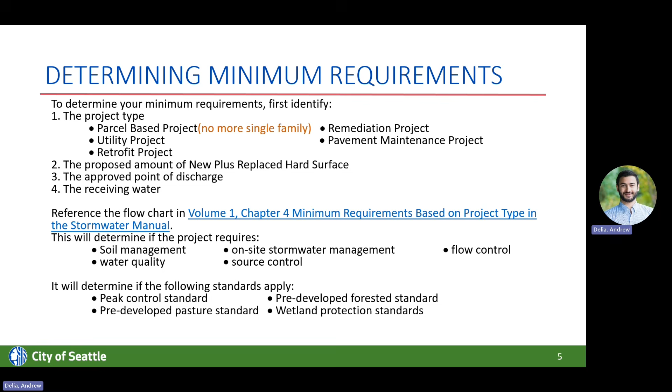Reference the flowchart in Volume 1, Chapter 4, titled Minimum Requirements Based on Project Type in the Stormwater Manual. This will help you determine if the project requires soil management, on-site stormwater management, flow control, water quality, and/or source control. It will also help you determine if the following flow control standards apply: peak control standard, pre-developed forested standard, pre-developed pasture standard, and/or the wetland protection standards.

Stormwater review requirements. Stormwater review is required for all projects with 750 square feet or more of new plus replaced hard surface. For projects equal to or greater than 750 square feet, drainage review is required, and the submittal requirements are a small project CSC soil standard plan, a stormwater plan, and an infiltration investigation only if there is no off-site approved point of discharge.

For projects greater than or equal to 750 square feet on a lot adjusted in size after 2016, stormwater review is required and on-site stormwater management applies to the project. The submittal requirements include the small project CSC soil standard plan, the stormwater plan, the OSM calculator, and an infiltration investigation if the site is required to investigate infiltration feasibility or to prove infeasibility of infiltrating BMPs.

For projects greater than or equal to 1,500 square feet of new plus replaced hard surface, stormwater review is required and on-site stormwater management applies. The submittal requirements are the same: a small project CSC soil standard plan, a stormwater plan, the OSM calculator, and an infiltration investigation.

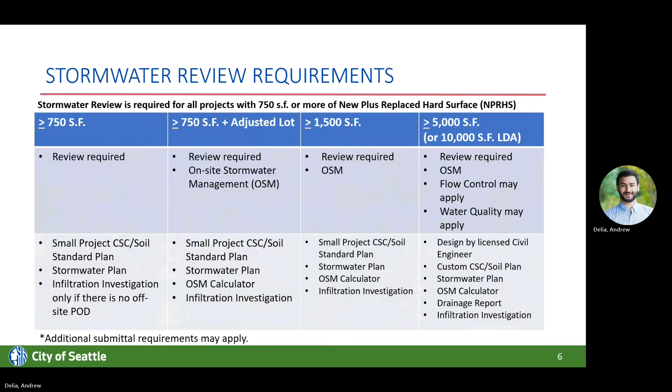Stormwater review requirements continued. In the last slide, we talked about the basic new plus replaced hard surface thresholds for drainage review. However, there are a few additional stormwater review triggers that are not determined by the new plus replaced hard surfaces. Stormwater review is required for all projects that require a grading permit. Stormwater review is required if you are applying for a subdivision, short plat, unit lot subdivision, or lot boundary adjustment.

Some projects with activities that are likely to require source control BMPs may require stormwater review. Projects that propose any new hard surface on Category 1 peat settlement sites require stormwater review. Sites with greater than 5,000 square feet of land disturbing activity or demolition require stormwater review. Projects that propose new or replaced hard surface or any land disturbing activity on, adjacent to, or within environmentally critical areas may trigger drainage review.

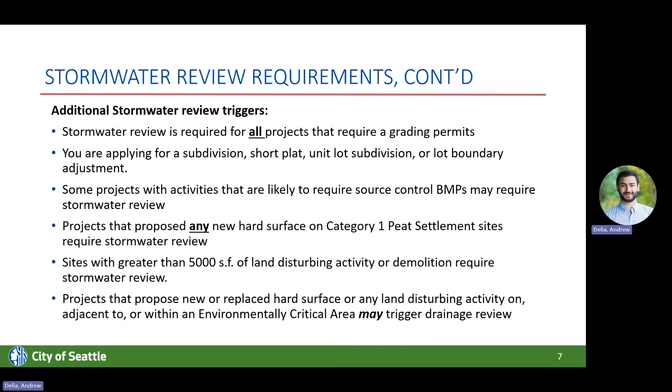New hard surfaces. Before we move on to the different stormwater management thresholds, I want to review some important definitions and concepts, some of which have changed or are new to the 2026 code update. We'll start with hard surfaces, as it is important to understand this since most review thresholds are determined by the amount of proposed new plus replaced hard surface. New hard surface means the creation of a hard surface or the conversion, modification, or upgrade of an existing hard surface to another hard surface.

Examples of a new hard surface include, but are not limited to, converting, modifying, or upgrading, such as the following: vegetation, lawn, dirt, or other earthen material to a hard surface, for example, compacted gravel, packed earthen material, permeable pavement, a bituminous surface treatment such as chip seal, asphalt, concrete, or a structure. Gravel to permeable pavement, chip seal, asphalt, concrete, or a structure. A hard surface to a modified hard surface, for example, grading an existing parking area and repaving.

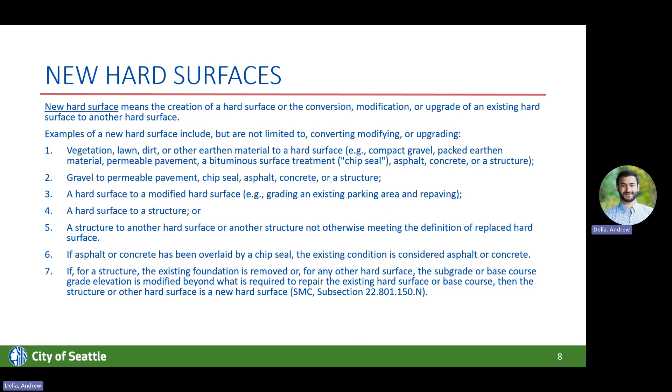A hard surface to a structure, or a structure to another hard surface, or another structure not otherwise meeting the definition of replaced hard surface. If asphalt or concrete has been overlaid by a chip seal, the existing condition is considered asphalt or concrete. If, for a structure, the existing foundation is removed, or for any other hard surface, the subgrade or base course grade elevation is modified beyond what is required to repair the existing hard surface or base course, then the structure or other hard surface is a new hard surface. Refer to Seattle Municipal Code subsection 22.801.150.N as in Nancy.

Replaced hard surfaces. Replaced hard surface means, one, for structures, the removal of the structure down to, for example, exposing the top of the foundation without removing the foundation, and replacement of the structure. And two, for other hard surfaces, the removal of the surface down to the existing base course or exposing the top of the subgrade and replacement, including repair of the base course layer.

As shown in orange, note that in the 2026 code, replaced now includes situations where a structure is removed down to a foundation, but the foundation, slab, or basement is to remain.

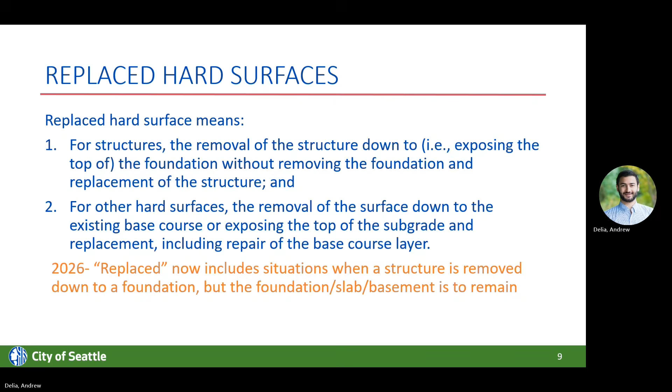Approved point of discharge for stormwater. Stormwater, subsurface drainage, and sanitary points of connection are usually identified in the Preliminary Assessment Report, or the PAR. If your project did not receive a PAR, contact SPU to make this determination using the email address sidesewerinfo@seattle.gov. Stormwater points of discharge include the public storm system, such as a storm main, or alley discharge, which is

applicable to small projects only, providing less than 5,000 square feet of new or replaced hard surface where a curb and gutter exists. The public combined sewer is an approved point of discharge. An on-site infiltration/dispersion can also be an approved point of discharge. This is often referred to as no off-site point of discharge.

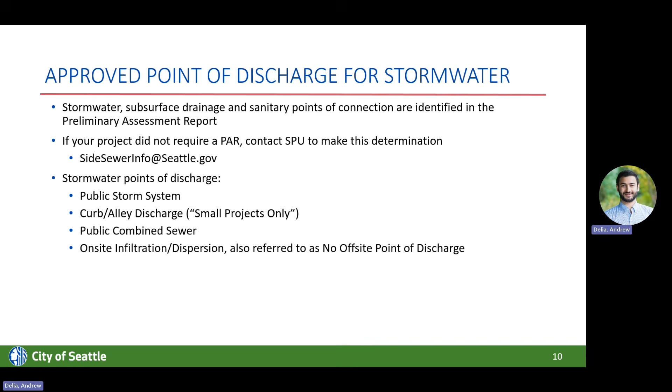Closely related projects. Closely related projects must be evaluated as one when determining stormwater thresholds. See Volume 1, Section 2.1.2 of the 2026 Stormwater Manual for the code excerpt, Closely Related Projects. Closely related projects means two or more projects that are concurrently under review, have issued permits not yet approved for final construction, or both, and share any of the following physical or functional interdependencies.

1. A feature physically spans the property lines between lots or project sites, such as shared structures, shared driveways, shared pedestrian access, including easements to rights-of-way, shared drainage and utility designs, foundation footings, or retaining walls. For purposes of this subsection, abutting driveways or pedestrian accesses are not considered to span the property lines if the required driveway or pedestrian access width for each project independently meets development standards.

2. A shared driveway is proposed to access a parking area for more than one project, regardless of whether the parking is required. 3. Parking, including maneuvering, aisle requirements, or other parking-related easements, regardless of whether the parking is required, is proposed to be provided or partially provided on the site of another project, even if the project sites do not abut each other. 4. Proposed structures are joined or share a common wall. 5. Proposed projects share required open space, amenity area, or both.

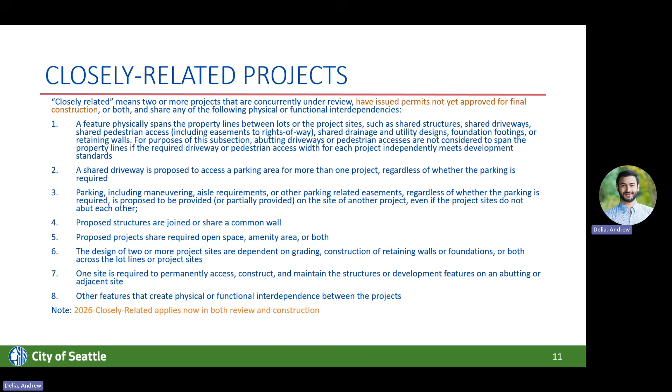Common Plan of Development. Entirely new to the 2026 code is the definition for Common Plan of Development or Sale. See Volume 1, Section 2.1.3 of the 2026 Stormwater Manual for the code excerpt related to Common Plan of Development or Sale. Common Plan of Development or Sale means a site where multiple separate and distinct construction activities may be taking place at different times, on different schedules, and/or by different contractors, but still under a single plan.

Examples of Common Plan of Development or Sale include, but are not limited to, phased projects and projects with multiple filings/lots, even if the separate phases or filings/lots will be constructed under separate contract by separate owners, for example, a development where lots are sold to separate builders.

2. A development plan that may be phased over multiple years, but is still considered under a consistent plan for long-term development. 3. Projects in a contiguous area that may be unrelated, but still under the same contract, such as construction of a building extension and a new parking lot at the same facility. And 4, linear projects such as roads, pipelines, or utilities.

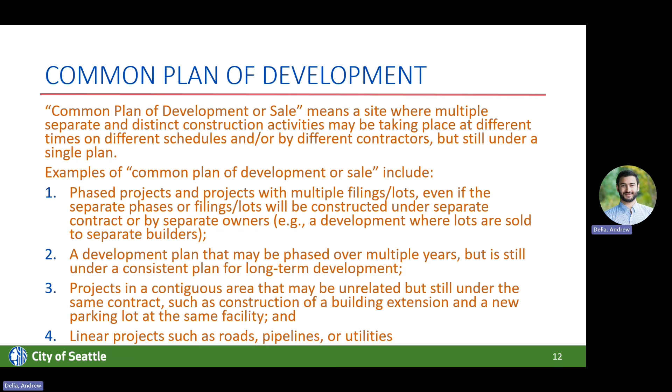Stormwater management thresholds. Refer to Seattle Municipal Code, Section 22.805.050, parcel-based project thresholds. On-site stormwater management remains unchanged in the new 2026 code, and 1,500 square feet of new plus replaced hard surface triggers OSM. Flow control in combined sewer basins also remains the same. 5,000 square feet of new plus replaced hard surface triggers flow control in combined sewer basins.

Flow control in creek basins also remains unchanged in the 2026 code, as 5,000 square feet of new plus replaced hard surface triggers flow control in creek basins. Flow control in small lake basins has increased in threshold in the 2026 code. Previously, 2,000 square feet of new plus replaced hard surface would trigger flow control in these basins, and in the 2026 code, 5,000 square feet of new plus replaced hard surface will trigger flow control in small lake basins.

Flow control in capacity-constrained basins also changes in the 2026 code. Previously, 2,000 square feet of new plus replaced hard surface would trigger flow control. Now, 5,000 square feet of new plus replaced hard surface will trigger flow control in capacity-constrained basins.

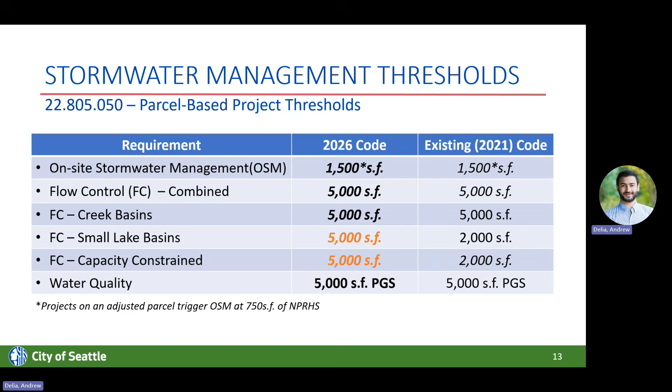Water quality remains unchanged in the new code, and still 5,000 square feet of pollution-generating surfaces will trigger water quality treatment. Note that projects on an adjusted parcel trigger OSM at 750 square feet of new plus replaced hard surface, and those parcels are defined as lots that changed in size or were created after 2016.

On-site stormwater management. There are two methods to meet the OSM requirement. You can either use the list approach or the performance standard. The on-site list approach, using the list approach calculator, requires you to choose a BMP in the highest category feasible. All BMPs are pre-sized except for rainwater harvesting.

If you use the on-site performance standard, you are able to choose BMPs to meet discharge requirements. This requires continuous rainfall runoff modeling and requires a report and sizing calculations signed and sealed by a PE.

As described in the Seattle Municipal Code, on-site stormwater management shall be installed to the extent allowed by law and maintained in compliance with the rules promulgated by the director to receive flows from that portion of the site being developed, and shall comply with either subsection 22.805.070.C, the on-site performance standard, or subsection 22.805.070.D, the on-site list approach.

Why choose one over the other? Projects that choose to utilize the performance standard for satisfying on-site stormwater management requirements can choose BMPs to implement regardless of the predetermined priority found in the list approach calculator, but do require a licensed engineer and further documentation.

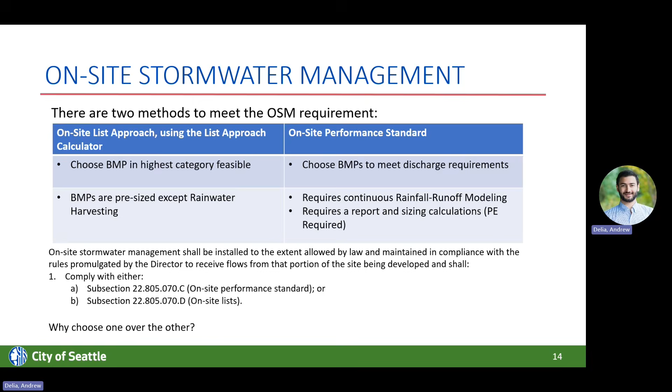On-site stormwater management continued. The first link here is a link on our website to the Excel spreadsheet titled On-Site Stormwater List Calculator. The list approach calculator was created so applicants can comply with OSM requirements without needing to hire an engineer or design professional.

Shown here in orange text for the 2026 code update, cisterns have jumped up one category in priority of evaluation, and bioretention sizing has been increased. The calculator is updated periodically. Please use the most up-to-date version from the website with each new project. Use the preliminary assessment report to complete the project summary in the calculator. Be sure to enable content in Excel.

Combine as many surfaces as possible for clarity, but separate surfaces that may flow to different BMPs or have different infeasibility criteria that apply. Be sure to submit the entire workbook output as a separate document. Expect this to be over 10 pages of output when using the list approach option, or 3 to 4 pages when using the performance standard.

Flow control. The definition of flow control, as found in Seattle Municipal Code subsection 22.801.070F, means controlling the discharge rate, flow duration, or both, of drainage water from the site through means such as infiltration or detention. A flow control facility is a drainage control facility for controlling the discharge rate, flow duration, or both of drainage water from a site. Refer to Seattle Municipal Code subsection

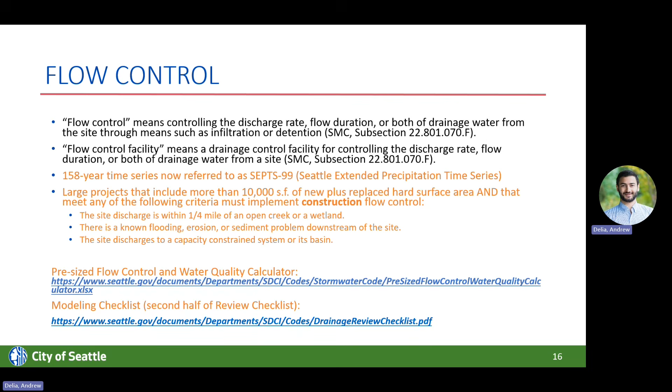The two links at the bottom are helpful for applicants. The first is a pre-sized flow control and water quality calculator, and the second is our modeling checklist. This takes you to the drainage review checklist, the second half of which our stormwater reviewers use when reviewing projects that have stormwater modeling. Water quality.

Projects trigger water quality treatment if they provide greater than 5,000 square feet of new plus replaced pollution generating surface, such as parking lots, roads, and under-drained sports fields. When triggered, water quality treatment BMPs must be installed to treat flows from the pollution generating hard surface and pollution generating pervious surface on the site being developed.

Water quality treatment BMPs typically remove pollutants through a combination of gravity settling, filtration, biological uptake, and soil adsorption. When stormwater flows from other areas, including non-pollution generating hard surfaces, such as roofs, dewatering activities, and flows that cannot be separated or bypassed, water quality treatment BMPs must be sized for the combined total flow.

As shown in orange, new in 2026, Green Lake is now considered a nutrient critical receiving water for projects within 1/4 mile of Green Lake whose discharge enters the lake. Also new in 2026, enhanced treatment is now referred to as metals treatment.

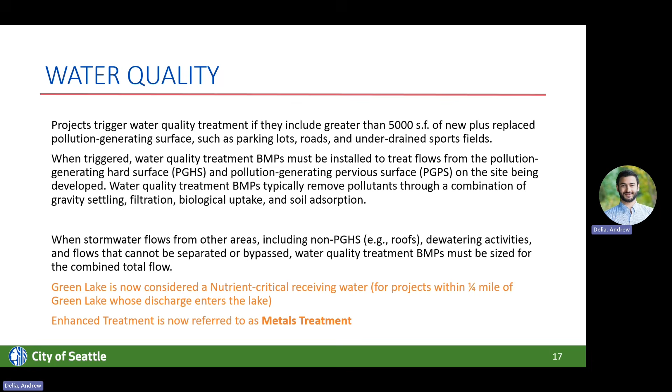Source control. Stormwater source control contains contamination at its origin using non-structural best management practices, including berming around fueling facilities, closing dumpsters, covering outdoor storage, and cleaning up spills immediately. Please see the summary of changes to the manual on the Stormwater Code page for a comprehensive list of changes to Source Control Volume 4 Seattle Stormwater Manual. Here are a few of the significant changes in 2026.

PFAS, pollutants from rubber preservatives including 6PPD-q, PAHs, and PCBs have been added as targeted pollutants. The manual update added pH as a measure of potential pollution to the descriptions of typical pollutants. More information on the management of targeted contaminants can be found in Volume 4, Section 1.3 of the 2026 Stormwater Manual.

New in 2026 is BMP 4, Proper Storage of Solid Wastes, which provides new guidance on managing trash enclosures and dumpster requirements. Also new in 2026, BMP 8, Constructed Dog Runs, now includes at-grade dog runs rather than just rooftop dog runs.

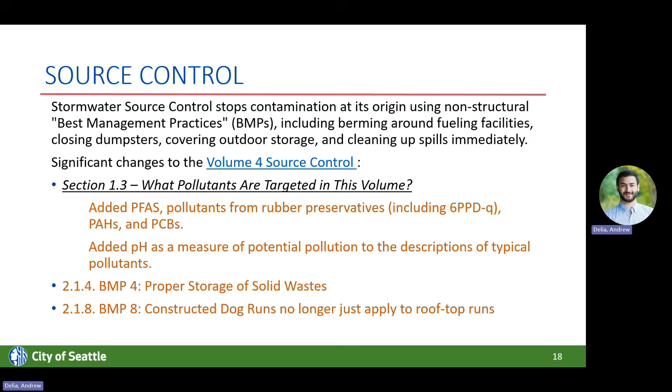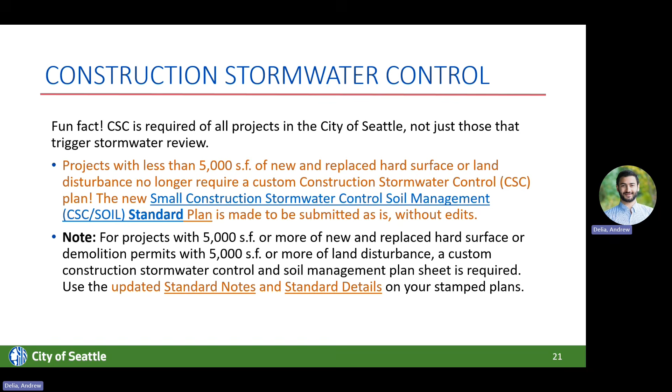For projects with 5,000 square feet or more of new and replaced hard surface or demolition permits with 5,000 square feet or more of land disturbance, a custom construction stormwater control and soil management plan sheet is required. Use the updated standard notes and standard details on your stamped plans.